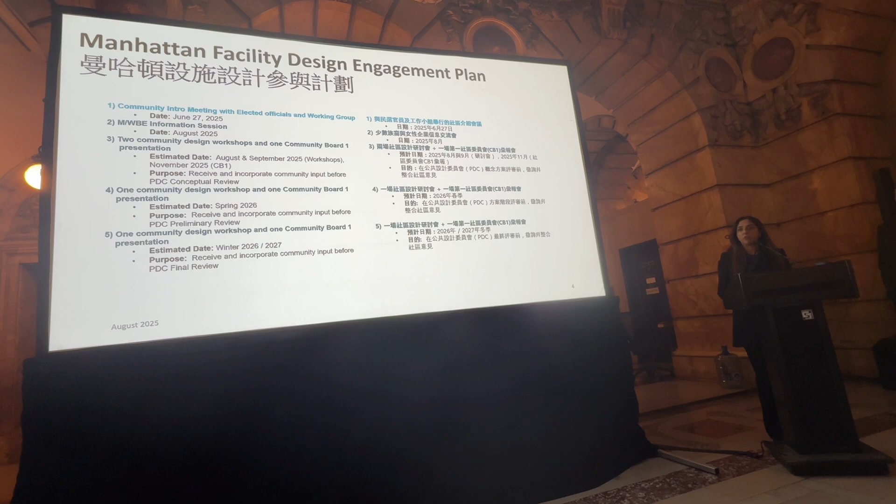So we're here today with one of our first community workshops. We'll come back to you similarly in September, and then we'll come back to the community board, which is open to the public, so you're all welcome to join in November. These three events will inform our submission to the Public Design Commission.

That's our first submission, a conceptual submission. After that, we will come back to you in spring 2026, and again to the community board in spring '26, to inform our preliminary design submission to the public, to the PDC. Then again we'll come back for a community workshop and a community board engagement in winter of '26-'27 before we submit for the final PDC review.

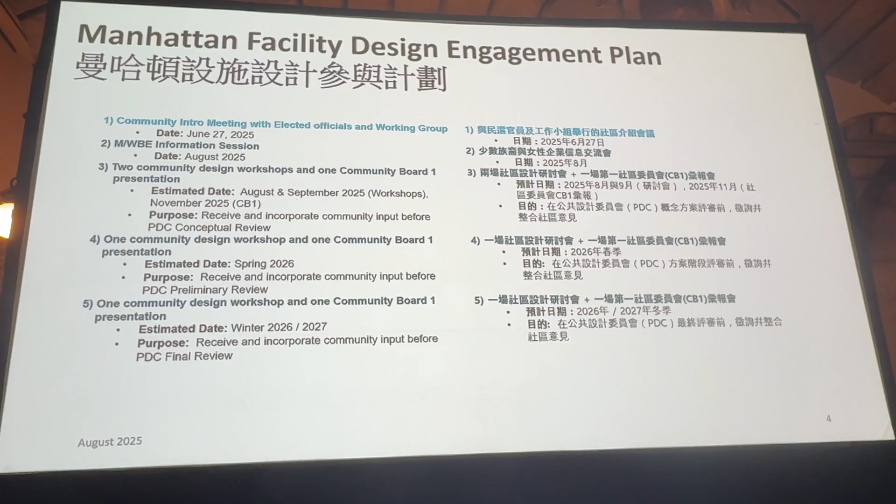The most important part of this entire process is that we're really looking forward to your feedback, to incorporate it and have it positively shape the design and development. This is essentially a graphic of the process that I just described.

We were selected as the design builder and architect for this process. During the selection process, we prepared a design that was to scope and test fit the process. Upon our selection, now is when the true design work really begins.

Therefore, you have the opportunity in the 4 community workshops and the 3 community board engagement processes to really provide your input, and we'll be bringing the design to you in various stages of development for that process to be undertaken.

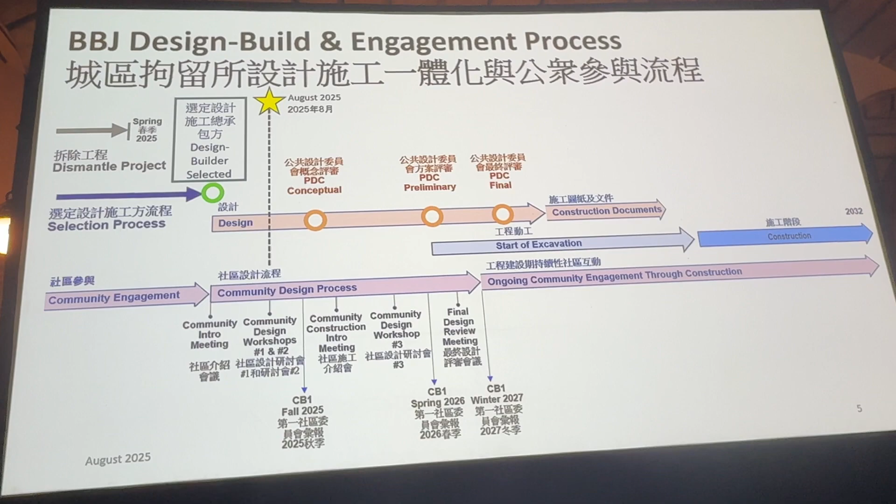All of that happens in the design phase, out of which we then start the construction phase. Again, our partners, TBC and ONG, are going to come to you with a plan for the construction engagement, so similar to the design, we'll also have a construction engagement process where you'll be able to provide community feedback.

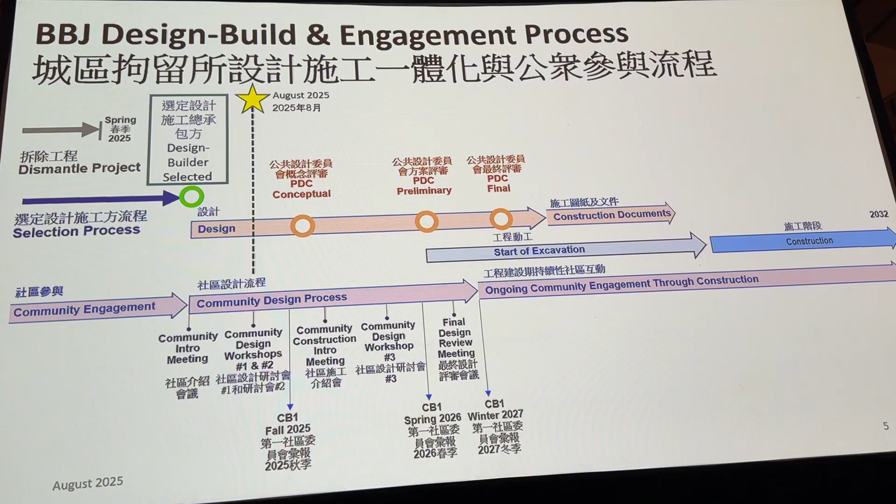But today is really about talking to you about the design, where we are in its progress, and how you might provide input there. There are 4 areas that the community can truly impact and provide their feedback.

That is the public realm. It includes the streets surrounding the site, including the White Street pedestrian arcade. The architecture, which is the building materials, the street level experience, the interior public spaces of the public lobby and visiting spaces, and also the interior secure spaces for people in custody.

We understand, we're intimately familiar with the fact that you've had prior engagement with the team, with the city team, before our selection. We had all of the material made available to us during the selection process, so we read through it and made ourselves intimately familiar with it. We continue to incorporate that into our design, so all of the time and effort you've spent does inform how we develop the design.

We understand there are concerns about the contextual relationship of the project to its neighborhood, the materiality, use of natural materials, the durability of those materials, providing a safe and secure street experience that integrates lighting, integrates landscape, and provides space for art and for families. Equally important, all of this engagement is held equitably both in English and Chinese, so we're providing translations today, and there's a conference room upstairs for dedicated Q&A.

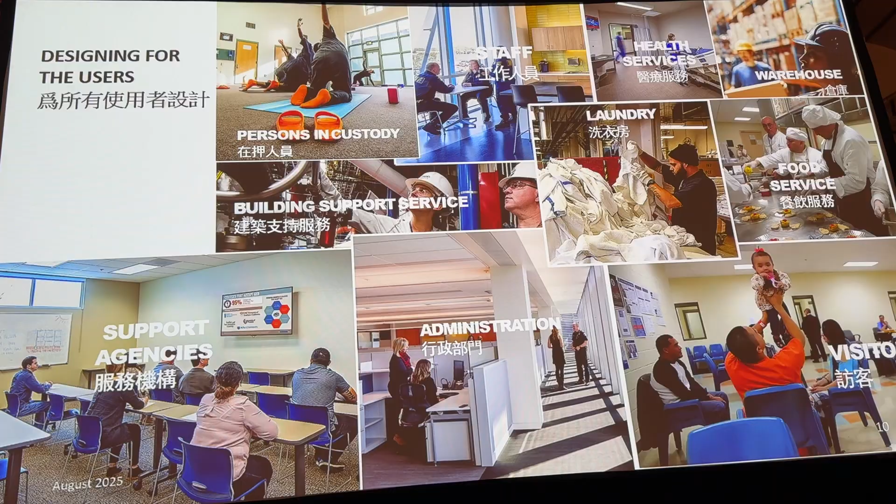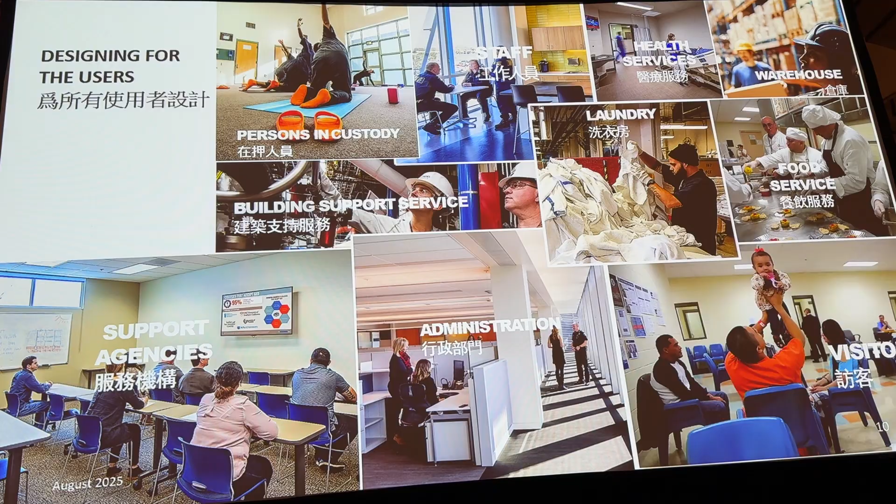As a reminder, there are many different elements that go into a facility like this that are important to the agencies running the facility and also to the community. Those things include programs for persons in custody, elements for staff well-being, and also access to the community, including visiting and other elements. It's all about normalizing the experience of going to a New York City jail. All of those are going to be incorporated into this project.

Some of the guiding principles we're following are very important to the ethos of this project. We're looking for opportunities to provide natural light deep within the floor plates. This is a healing opportunity to feel access to light and views. We want to give the persons in custody a sense of autonomy, a sense of individual freedom within the context of the indoor spaces.

It's also important that for every day room, we're providing access to the outdoors, naturally ventilated, filled with daylight, and opportunities to see the sky and views of the city.

We want to normalize the space. We've studied behavioral spaces all over the world, and it's very important to us to create a space that helps the occupants feel like normal people. We hope to use a variety of materials, natural materials, colors, soothing colors and textures to promote a sense of warmth, and even looking for opportunities for biomimicry so that there's connections to nature.

And we're providing increased access to medical and mental health care. There are floors dedicated for therapeutic individuals, and that's integrated into this facility.

There are also programs for education. There's teaching spaces, there's a chapel, there's horticulture, there's classrooms, there's culinary, lots of opportunities to take additional courses. The whole idea is to normalize the space.

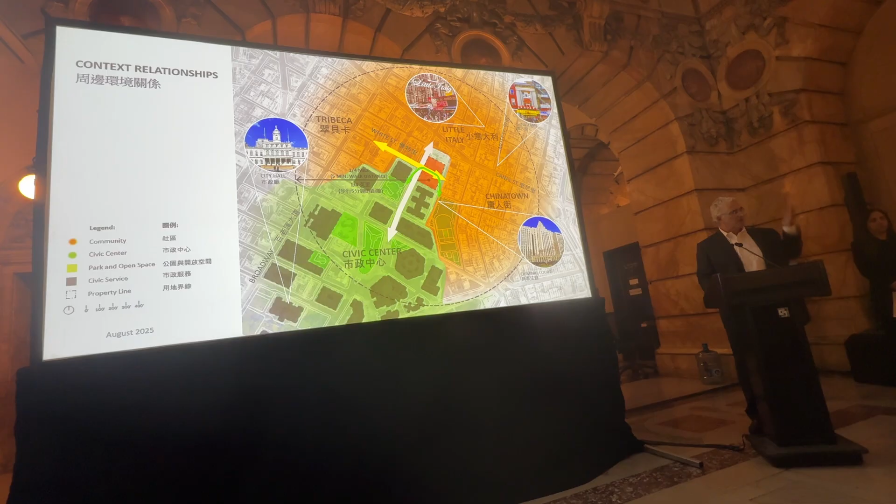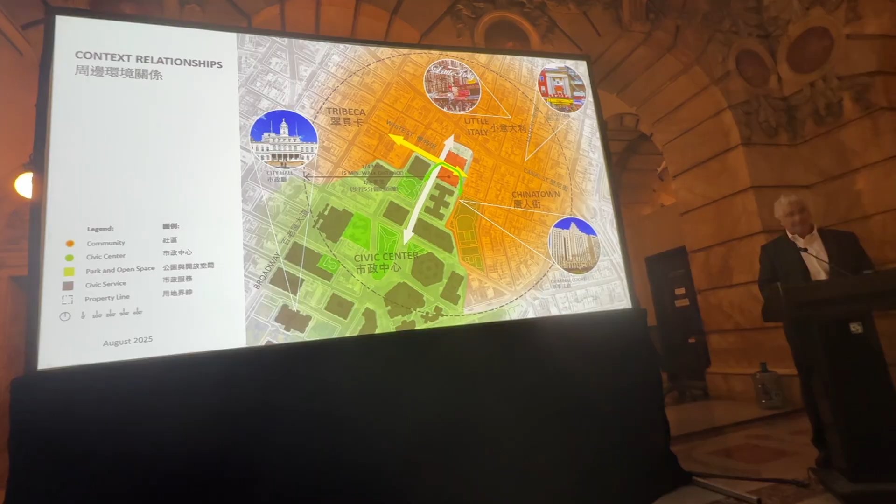So it's very important for us to look for opportunities to bring daylight deep within the White Street pedestrian arcade. In fact, we've widened the arcade from the 35 feet that was part of the ULURP requirement to 50 feet, almost the full 60 feet of the New York City street.

Zooming in on the site itself, what's important to understand is that the grain of the Chinatown community is very different than the grain and scale of the civic community to the west. We are aware of the transportation issues, the subway tunnel, access points. We want to be able to connect Columbus Park through the White Street pedestrian arcade to Collect Pond Park.

It's important to note that the ULURP process, as I said, had the arcade at 35 feet wide. We think the 50-foot width will provide ample opportunity for this group to help program that space.

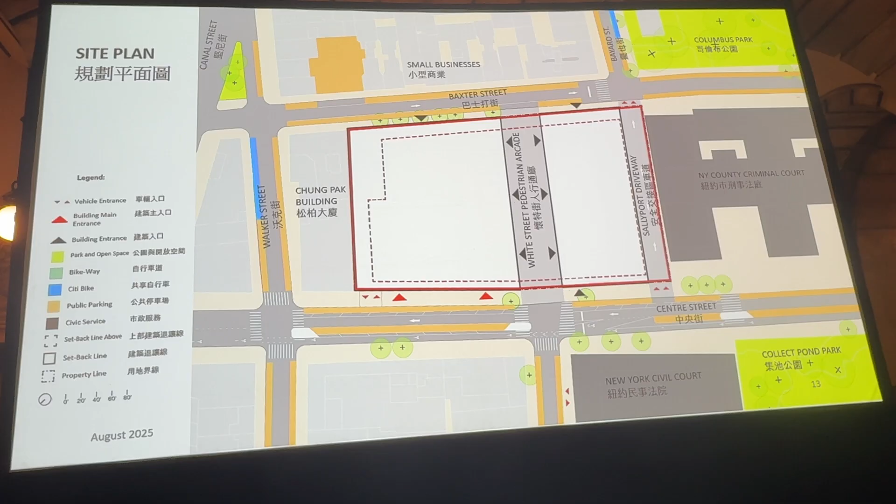The smaller in and out areas on the left-hand side, closer to Walker Street, is where access is for accessory parking. Then there's a through-block one-way connection for Sallyport Driveway, which is basically a secure driveway open to the sky for loading and servicing the facility. Sallyport is where persons in custody are brought into the building. There are doors at both ends that you won't be able to see into the Sallyport, and it's a secure setting. It's important to note that all these access points were defined in the letters of agreement and ULURP package, so we're abiding by those agreements.

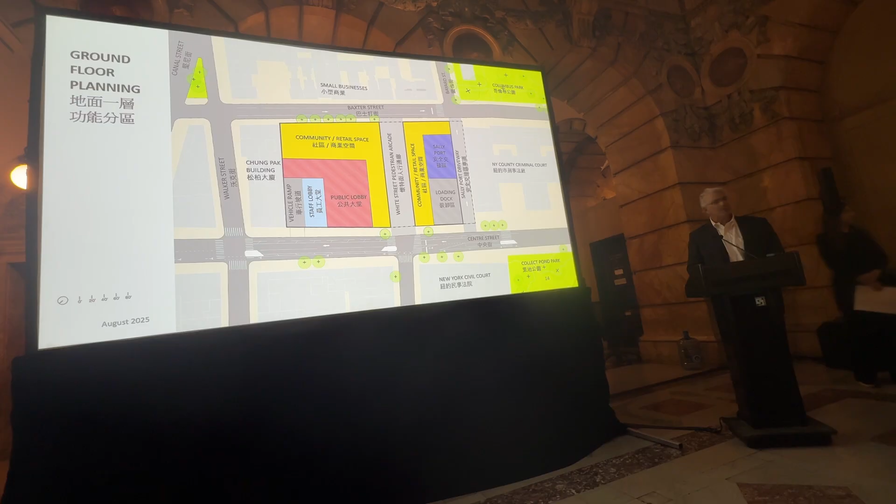It's important to note that we're adhering to the requirement for the 20,000 square feet of community space. That space we're treating as a white box space. It will be programmed by you during later sessions, not during these first 4 community meetings, but these will be scheduled by the DDC at a later date to lay out the yellow spaces you see. The community and retail space lines the passage, and the main entrance is on Baxter Street along the facade you see in yellow.

The pink represents the public lobby. The public lobby is where all visitors enter the building and are processed to move up to visitors on the upper floor. When people are released, they'll exit through the same lobby and a separate entrance, and that's where all the social services will be for people who are released. The staff lobby is a multi-story lobby that goes both below ground and above grade. I already mentioned the Sallyport and the loading dock to the right.

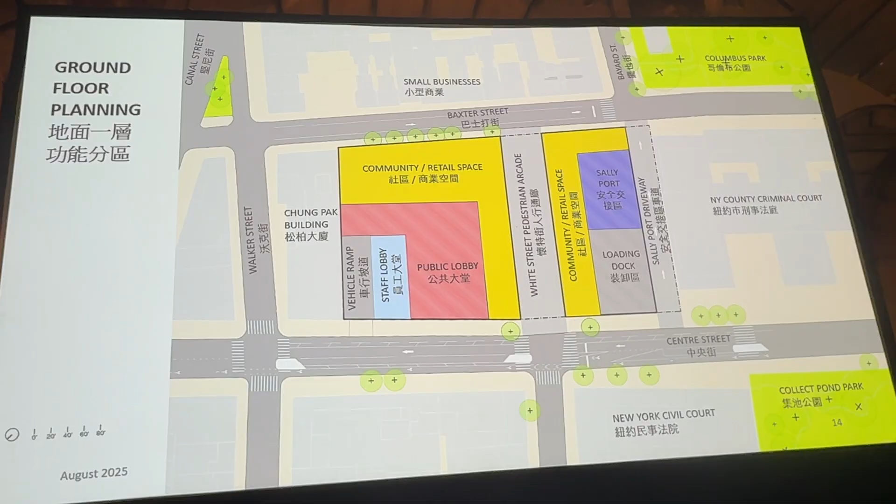This shows the connection that's really important to us. It's very important for us to have the White Street Passage as a pedestrian arcade, to connect Chinatown to Tribeca to the Civic District, but more importantly, to connect the green spaces that are so vital to Chinatown.

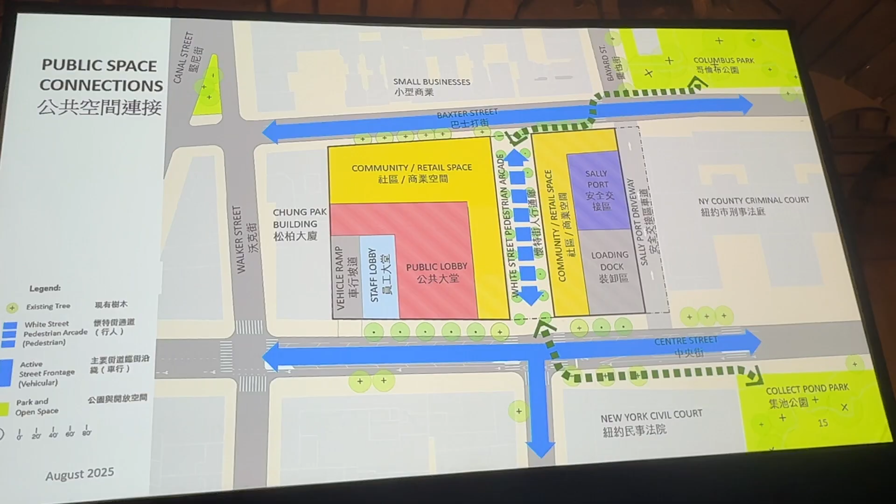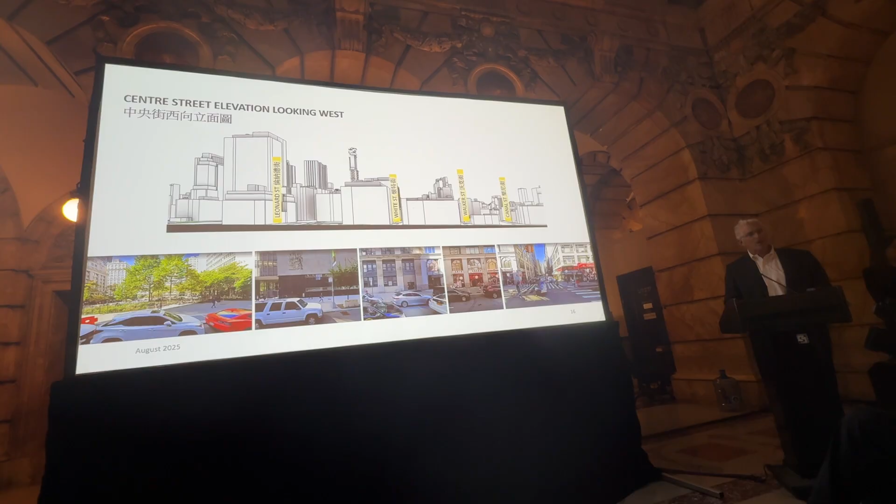Here you can see the scale of the streets as we develop our solutions for the facades. Once again, the facades in the concept design you saw last year were placeholders. We've already moved past that. We've begun to re-explore the materiality of the building, and to do that we have to understand that the scale of the buildings on Centre Street is very different than the scale of the buildings on Baxter Street.

The buildings on Centre Street are made of limestone. The modularity of the buildings is larger. It's retail—you can see the view down Walker Street. It's a very tight street wall, but the scale of the openings is larger on the civic side of the building.

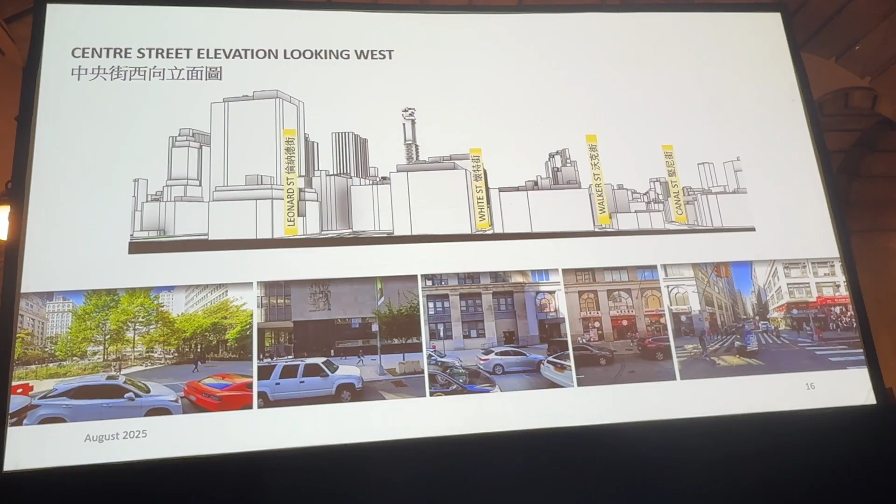From a landscape perspective, we see an opportunity to integrate seating. We have a secure environment, and we do have a requirement to provide security around the perimeter of the site. So we're integrating landscaping, bioswales, which are basically planters that take some of the storm runoff, like we had last Thursday night, and absorb that runoff before it goes into the storm sewers.

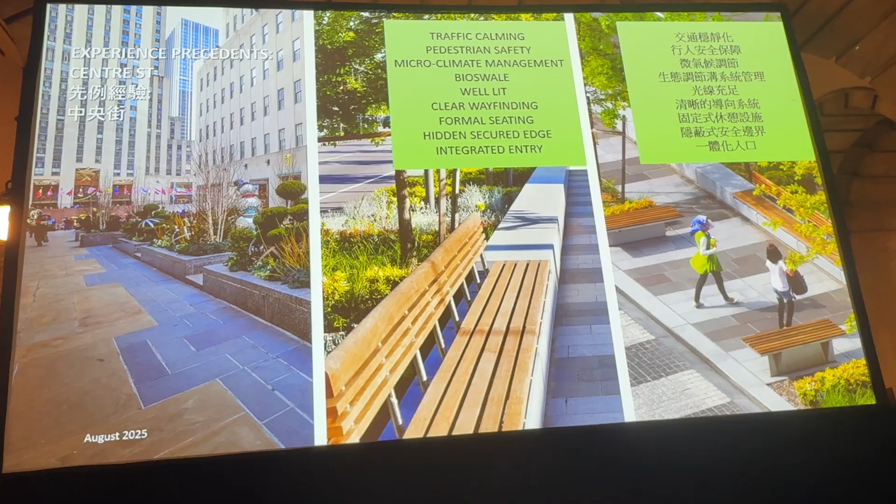But we're looking at a more rigid geometry along Centre Street that's more civic in scale. You can see the image of Rockefeller Center on the left. This is a rendering of our previous design, but it shows our desire to make sure there are street trees along Centre Street and Baxter, integrated with the security, landscaping, and seating, so we don't surround the entire site with bollards.

The scale of Baxter Street is entirely different. The materials are entirely different—you have brick, you've got awnings. Aman's going to go through our analysis of some of that, but the point is that we understand, as a responsible building, we need to deal with the scale, the texture, the grain of Chinatown, which is very different than the scale and texture of the civic side on the opposite side.

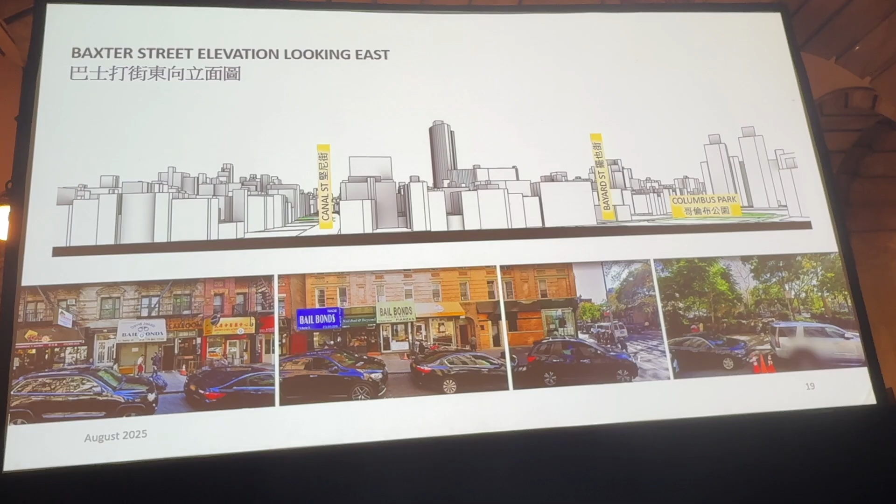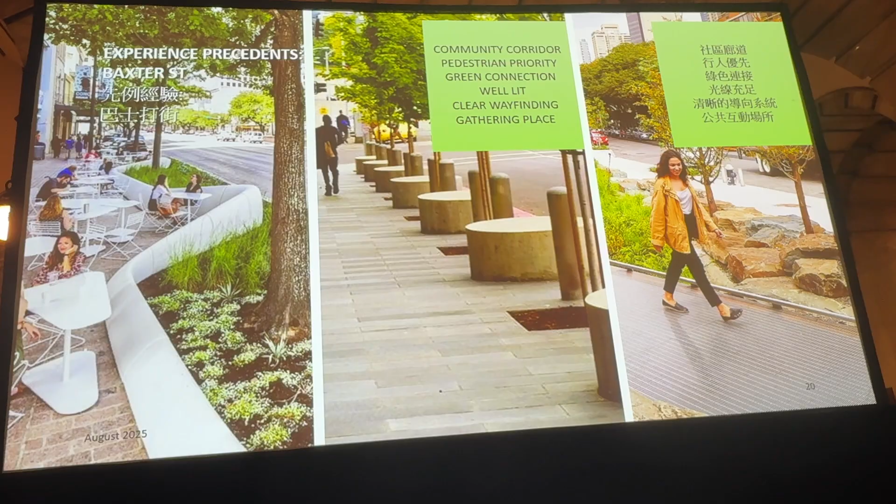What's great about Columbus Park is that there's a lot of different uses—it's more natural, it's got boulders. So here we're looking at opportunities along Baxter Street to actually expand the sidewalk in front of the community center. You will see security bollards, but we want to integrate seating, and take the concept of the softness of the boulders, which people also use as seating, for opportunities for people to congregate and meet and chat. We are planning on integrating our design of the landscape and the public realm with the architecture.

Our plan is to actually plant street trees along the frontage of both Baxter and Centre Street. So it's important for us to take the living room of Chinatown, which is Columbus Park, and look for opportunities to include color, variation, opportunities for small-scale groups, large-scale groups, and create a nice, welcoming experience.

We want to work with you in programming the White Street Pedestrian Arcade. We want to work with you in developing that.

We've got retail along that frontage. The goal is to take food and beverage seating and have it flow out into the pedestrian arcade. We want a clear passage from east to west.

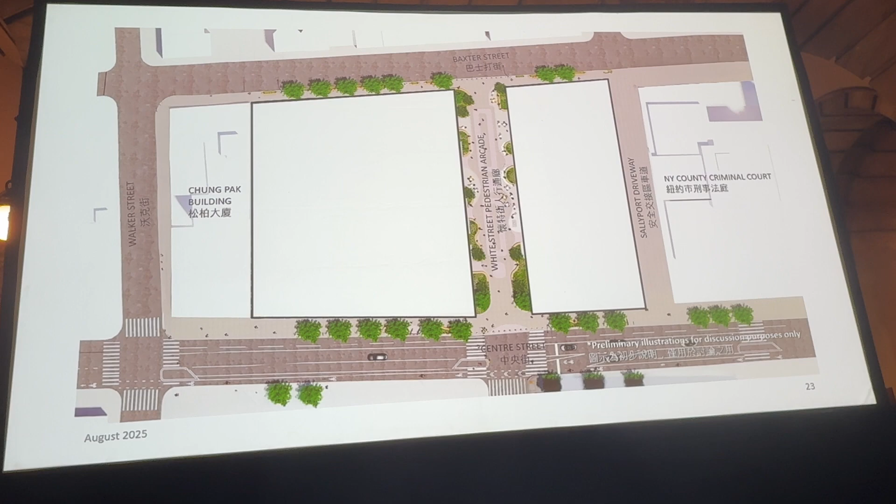This site is sloped. It's tall, higher on Baxter Street, and it slopes down to Centre Street. So the White Street Pedestrian Arcade is actually a gentle slope that goes from the high point at the top to the low point, and the idea is to integrate as much landscape into the site as possible.

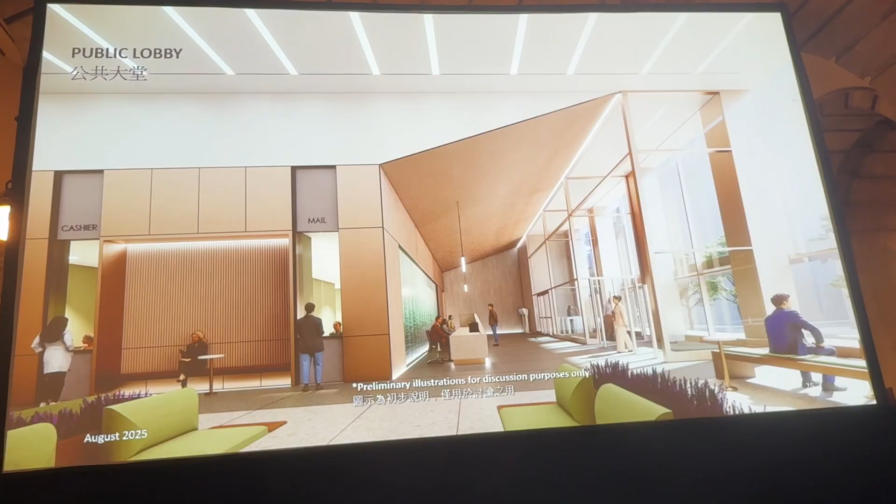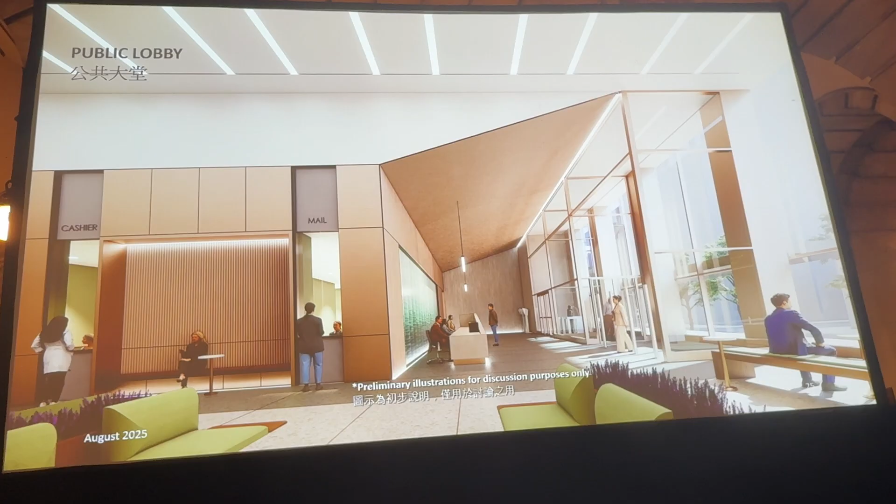Moving into the building, it's really important for us to capture daylight off of Centre Street. We would like to bring daylight from Centre Street deep into the lobby. We want the design of the lobby to reduce the stress of visiting for families and visitors, and to have social services and allow for people to de-stress as they're being released and return to the street. Our design integrates natural materials, principles of biophilic design, bringing nature into the lobby, providing for planting, warm colors, terrazzo for ease of maintenance, and bringing daylight deep towards the visitors.

In the lobby itself, we plan on integrating public art. There's cashiers, there's information. Visitors will be directed to the rear of the lobby, and then we'll take an elevator up to the upper floor. We also have a children's play area and vending machines. The idea is to create a warm, inviting, and welcoming space.

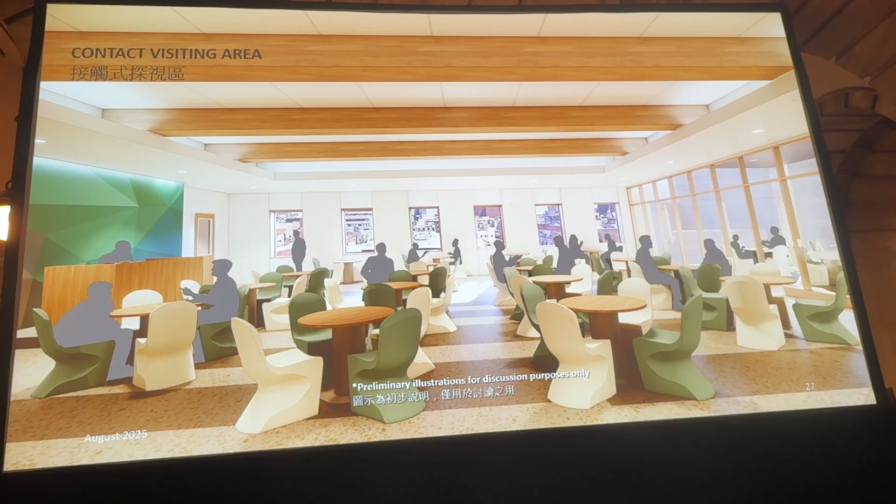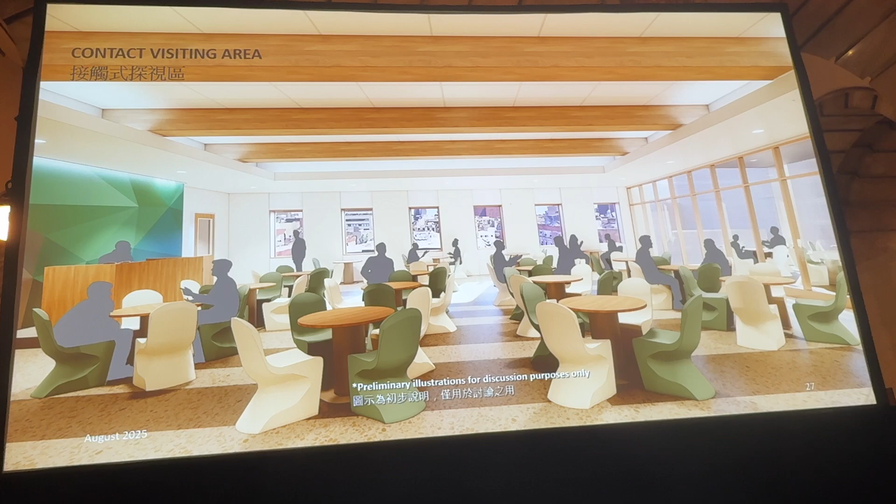Moving up to the visitation area, there are different types of visitation. There's contact visitation, which you see here. There's non-contact visitation, and there's visitation between attorneys and people in custody. The idea is to create light-filled spaces, warm materials, and opportunities for natural wood in some of the seating areas as well.

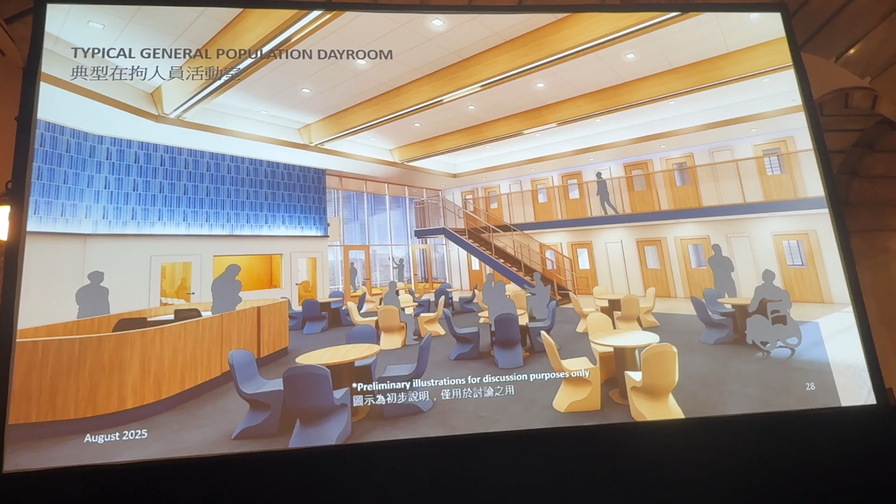You can see on the left-hand side, under the stairs, access to one of the recreation areas. Every day room, either single tier or double tier, has direct access to the outside. This provided outdoor space usually has basketball and other equipment within it, and the day room provides access to program spaces and multi-purpose rooms that surround the perimeter of the space. Every person in custody in this building will have access to this living space or a space like it.

Transitioning to the exterior of the building, we start with the location of the site, which is on the northern end of the Civic District. It is surrounded to the east and north by Chinatown and Little Italy, and to the west by Tribeca.

In the proposal stage, for example, we had looked at the language of the civic buildings, the vertical texture, and the scale of these buildings, and translated that through a modern interpretation into framed modules for the facade that provided solar shading for the users and the surrounding community, while also optimizing daylight.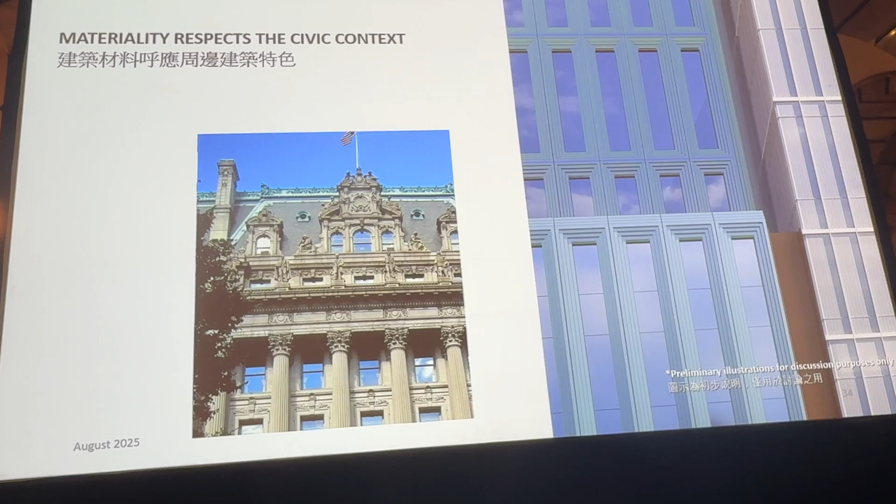We're also looking at these buildings for their color and materiality. The outer wings of the building were thought of as a lighter color that mimics the granite or limestone of the civic buildings, and the central part represents the copper patina often found in the civic context itself.

We will continue these studies and weave them into the neighborhood character. Here we're looking at a close-up view along Centre Street looking northwards. To the left, you see the main entrance of the facility, which carries the rhythm of entrances along other civic buildings on Centre Street, such as the Criminal Courthouse and the Supreme Court.

As we turn around the main entrance, on the right-hand side of the image you're looking at the White Street Arcade towards Baxter Street, which incorporates retail and landscaping, as well as lighting at the soffit level and the pedestrian level to provide a safe, appropriately lit environment.

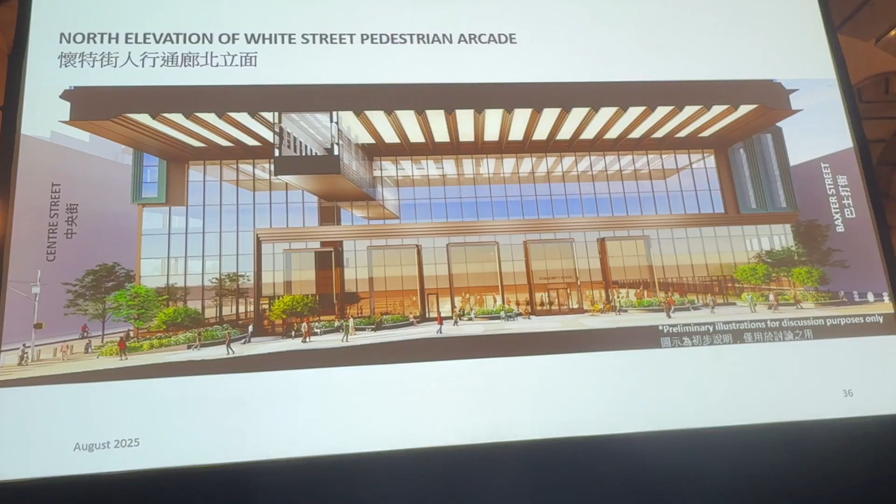Now coming down to the White Street Arcade itself, you're looking at an elevational view, cut through the building, looking northward. Based on the comments we've heard to date, we will be incorporating more natural materials in the design as we develop it moving forward.

The previous design incorporated glazing meant to represent transparency, making the street vibrant with the activity of the retail behind the glazed facade. But we're going to bring updates to the design that include more natural material at the next upcoming meetings with you.

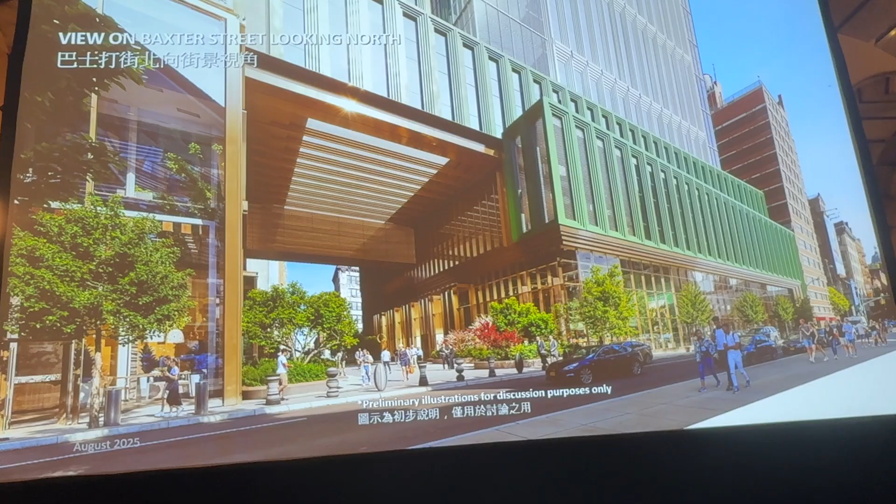Coming out of White Street Passage onto Baxter Street, again looking northwards, you see the White Street Arcade wrap around. Community and retail spaces are located all along Baxter Street, creating vibrant activity and active street frontages to provide a continuation of experience. Above these community and retail spaces are building support functions, and above that is where the housing units are located.

Now, the renderings you've seen so far were images developed during our proposal stage, part of the scoping exercise, and were placeholders. What we're bringing to you now, starting from this slide onward, is where we are with the design since we've been selected as the design builder.

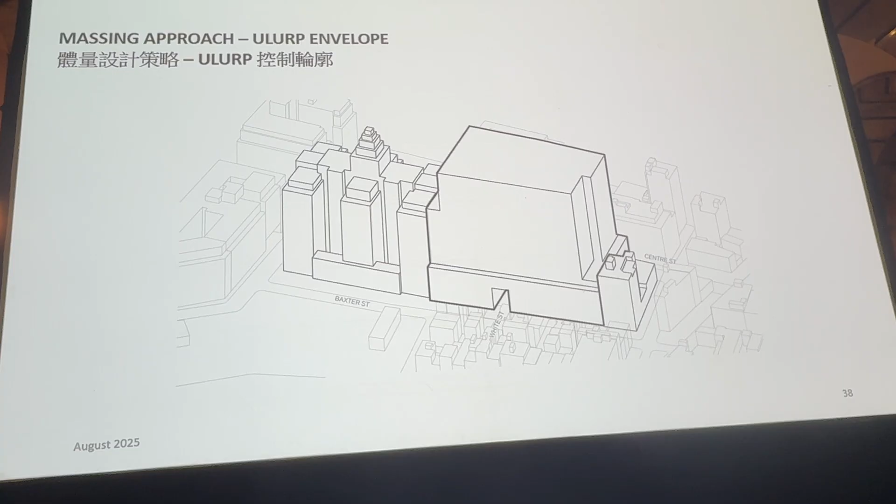So we're really starting at the beginning, looking at the blocking and stacking of the project itself. We started with the zoning envelope, the permitted envelope of building mass depicted here. Our first strategy is to register the White Street Passage vertically up through the building, and as described previously, our minimum requirement for the White Street Passage is 35 feet.

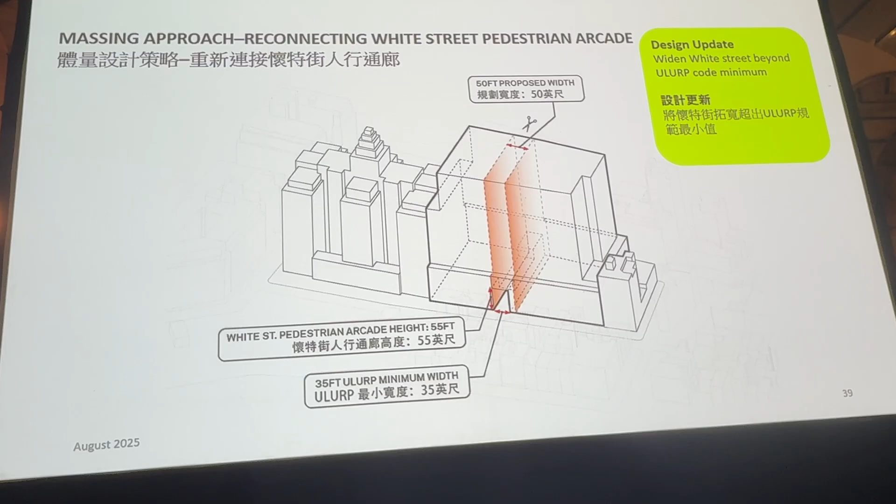We've increased that to 50 feet, so the experience at White Street really feels like a typical New York City street, which tends to be 60 feet, so we're very close to that. It's a continued experience of White Street that is west of the site. This strategy also helps us break the massing of the building down.

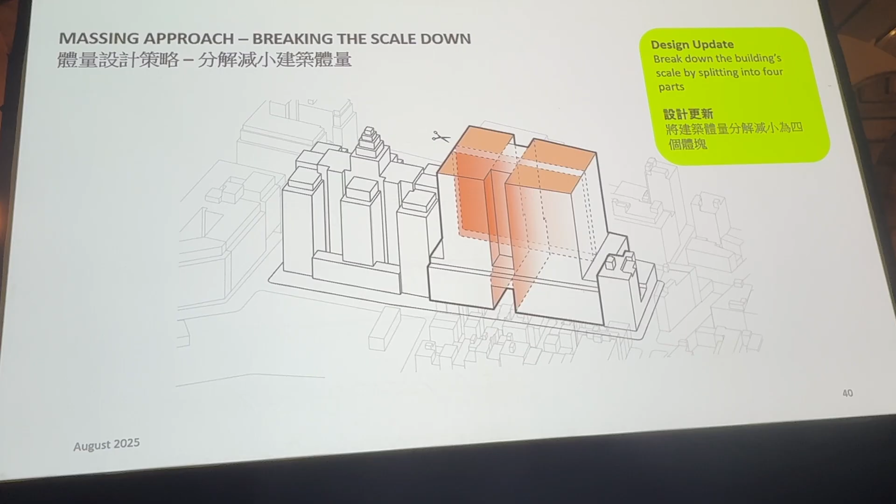Using the same logic, we also slice the building in the north-south direction, breaking it down into four wings of building, four smaller components that come together in one large mass. Once we separate these into wings, we're able to lower the heights of the individual wings.

The highest part is to the south, close to the Criminal Courthouse, and as we go north, into the lower context of the neighborhood, the building steps down. From west to east, the west has taller, larger scale buildings, while the east has finer grain Chinatown buildings, so the building steps down towards the east as well.

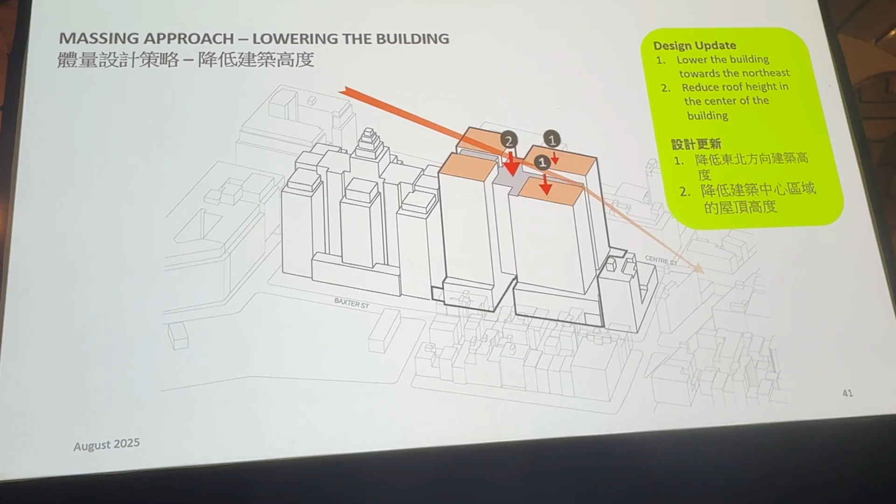And the building mass above White Street Arcade is stepped down the most, separating out the south wing of the building from the north wing, really creating that sense of scale and separation.

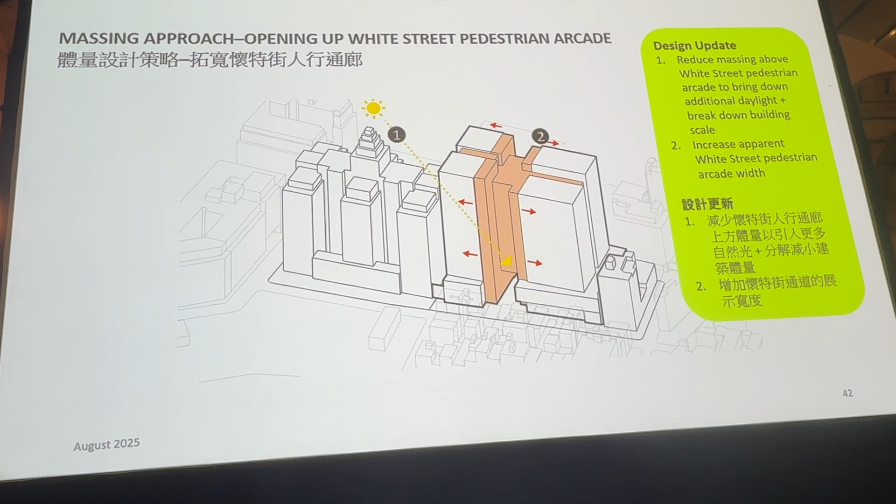In terms of how we apply materiality, the White Street Arcade and the building mass adjacent to White Street will be described in a warm material that we'll come back to in the fall. That makes White Street feel wider and more integrated with the environment.

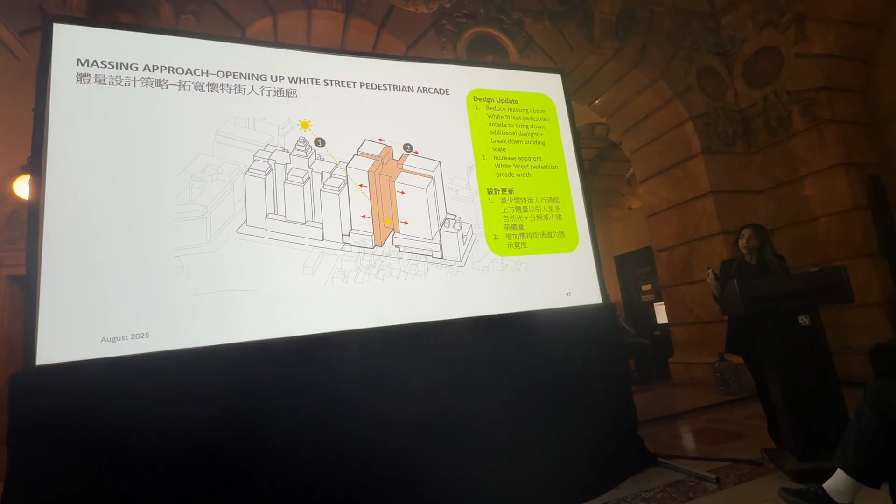Additionally, by stepping the height down and stepping the building mass in along the White Street Arcade, we're able to bring more daylight down into White Street.

The building mass shown in light white color surrounding the White Street Arcade also appears as similar volumes. Those volumes are meant to mimic the vertical volumes of the criminal courthouse, and that vertical rhythm continues and connects down to the civic scale.

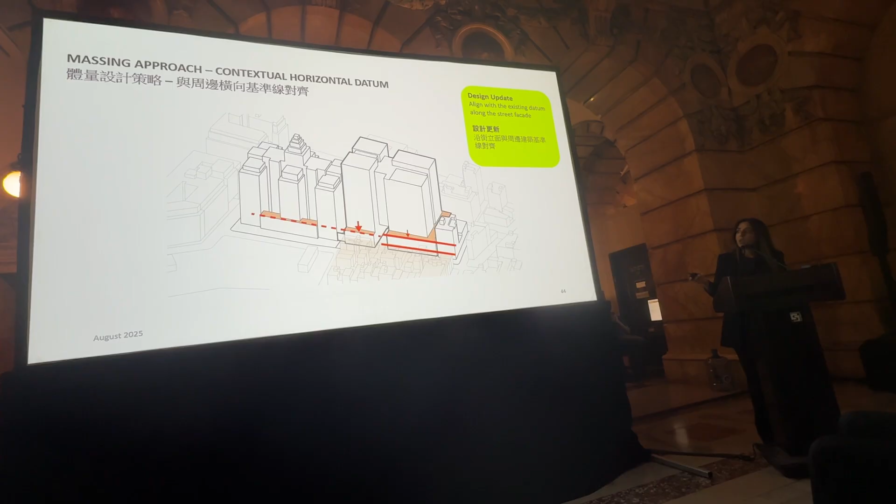At the podium, the lower floors of the building, we are also relating to the context. On the south of White Street, next to the criminal courthouse, the height of that podium matches the podium of the courthouse. To the north of White Street, the podium height matches the buildings across from Baxter Street.

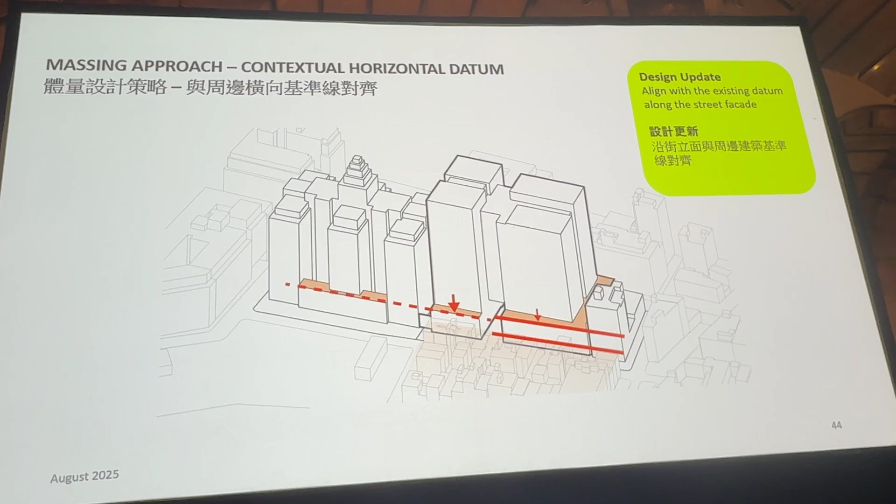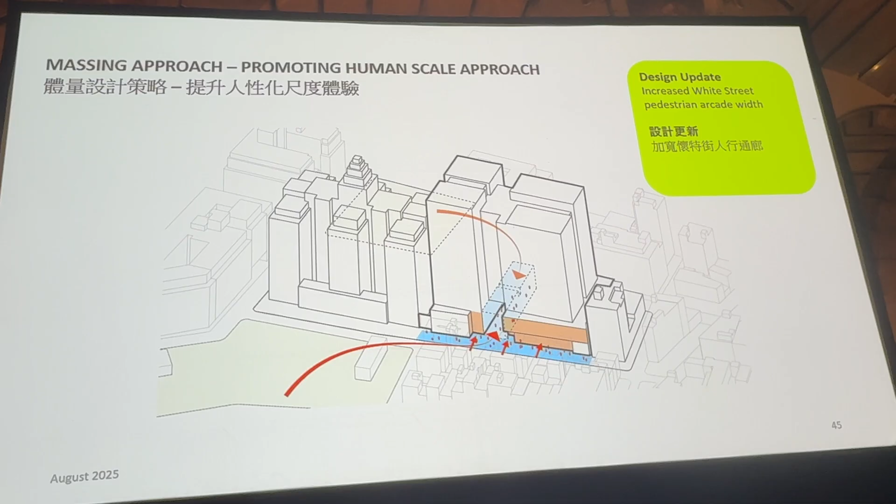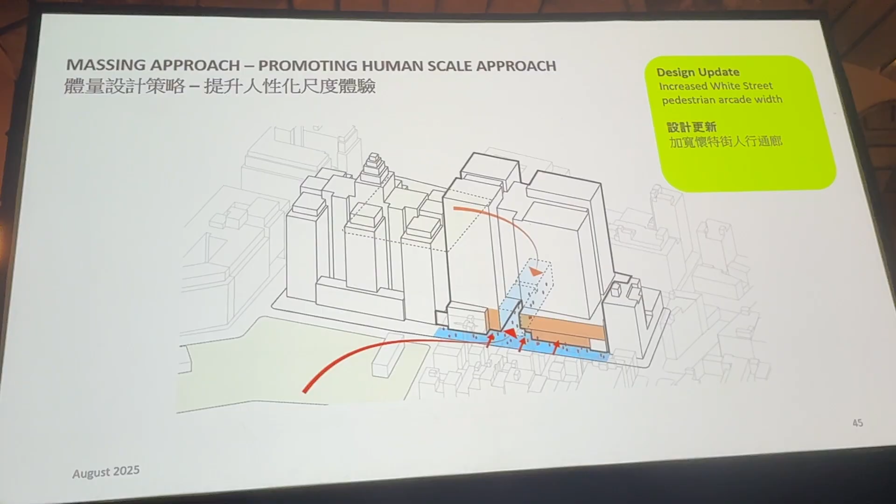At the ground floor, the building is stepped back to create a wider sidewalk and an enhanced pedestrian experience. At the intersection of White Street with Baxter and on the Centre Street side, the building mass is pulled back to create a public plaza, helping connect to both Collect Pond and Columbus Park and providing a visual and seamless physical transition between those spaces.

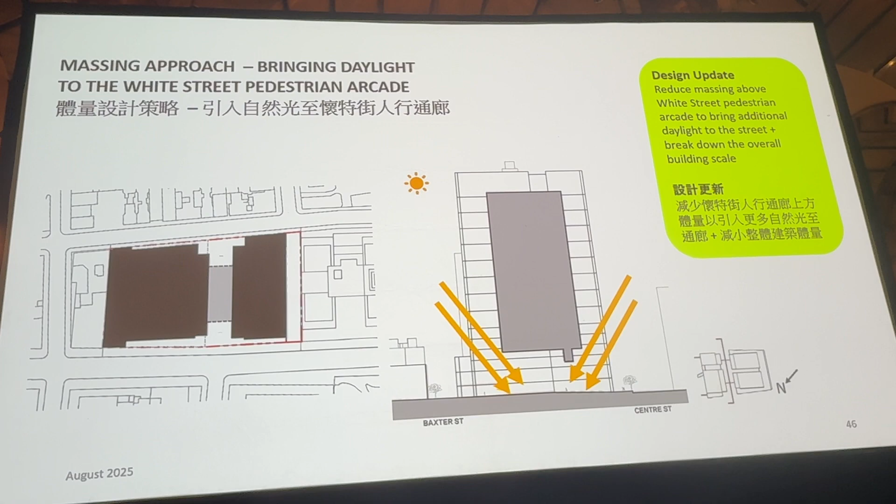This is a section going through the White Street Arcade. On the left-hand side you see a plan, with White Street shown as the white portion that goes through the building. What is shown in light gray between the two dark massing is the mass overhead on White Street.

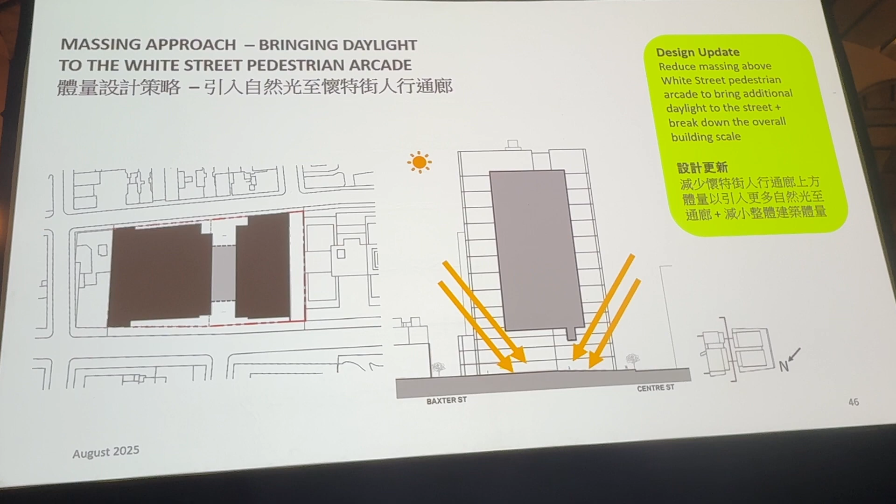The image in the center is the section, showing the amount of White Street that is open to the sky. This brings daylight deep into the street and gives it a street experience. The more daylight we can bring in, the more planting and trees we can incorporate in White Street, which is an important aspect of how we're developing the project.

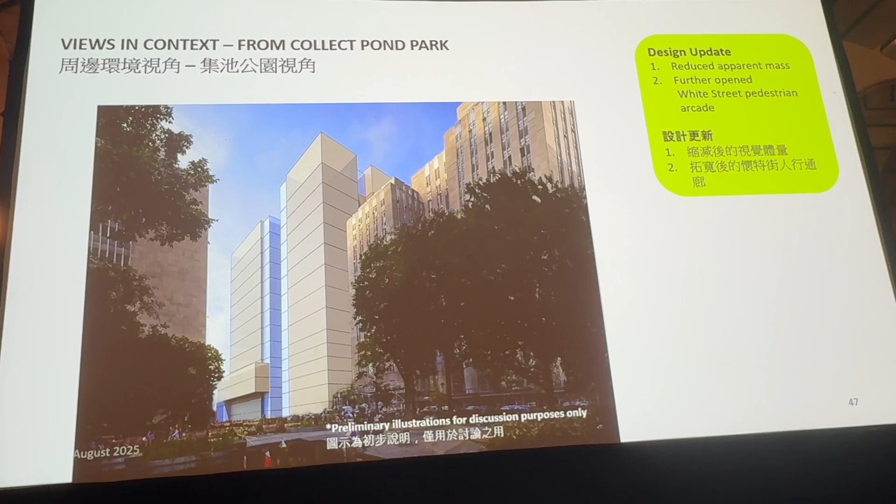Taking that blocking and massing, that's where we are at in our development at this point. Placing that in context, in expressing White Street we break the project down into slimmer volumes. Similarly, the view from Columbus Park does the same thing, and you also see the north-south cutout that breaks the southern facade, the facade facing the criminal courthouse itself.

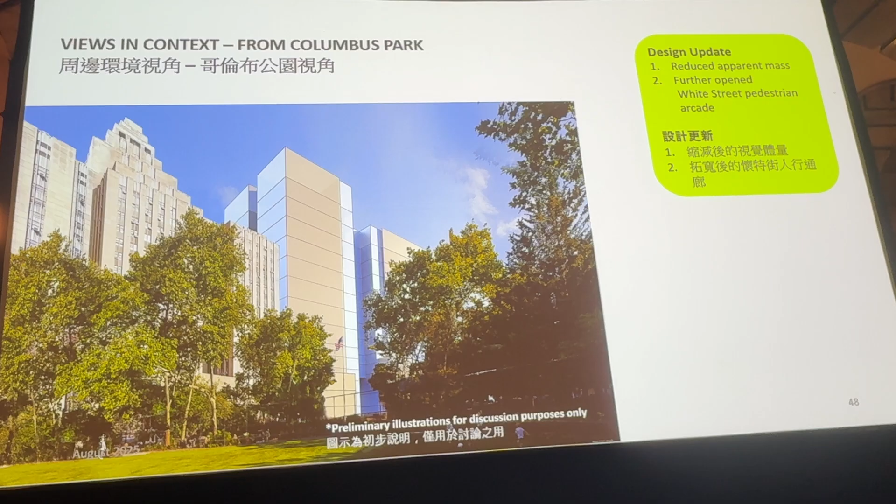So we thank you for coming today. We are committed to design excellence on this project. We understand this is a civic asset that needs to be responsible both in economic relationship to its city and its relationship to resources, optimizing performance and embracing sustainability, but also striving towards design excellence. That concludes our presentation portion.